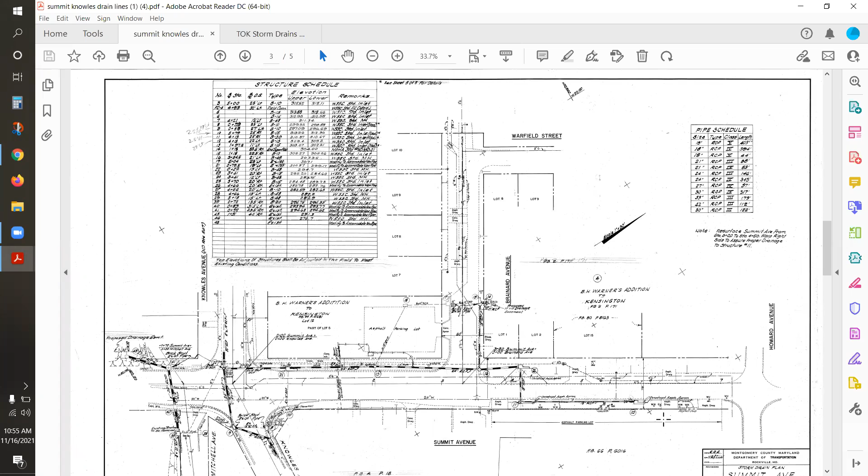So here's Knowles, that was further down from where I just spoke to. If you look further down here, you'll see that this is where Brainard is. So this is approximately where Red Ginger is, the Chinese restaurant. And, oops, sorry. And this is where Knowles Station was built.

So once again, these plans are at least from 1979. So that's what I'll give them the benefit from. So I'll just say at least 40 years old. And they were plans that were drawn up but never done. So it might give us a better idea of why we're flooding so much. So I'll start at the top.

So here's where Knowles Station is, right here. Over 40 years ago, they were planning on putting an 18-inch pipe running up. That was never put in. Kind of makes sense that if these plans were used as a baseline, that they thought that was here, because Knowles Station has water that runs all down the sidewalk and everything when it rains. So it's kind of really dangerous. So it'd be really nice if that 18-inch pipe was there.

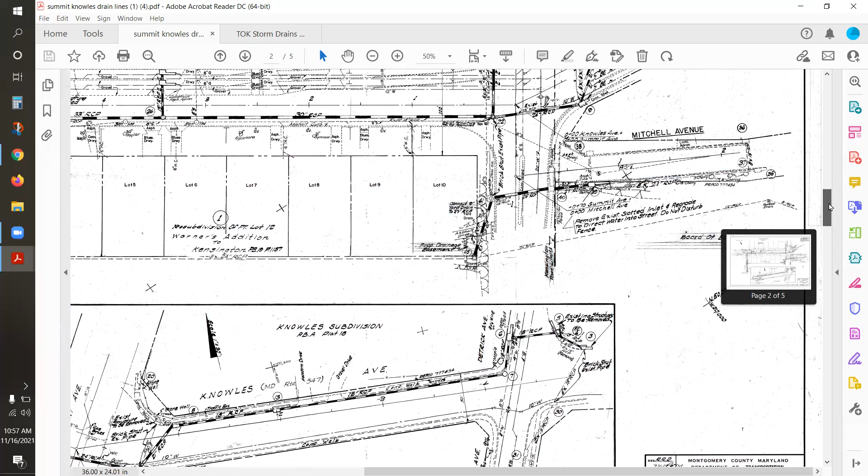Over here, this is Strosniders right about up here. And they were at one time going to block this 15-inch line that runs across, but it still exists. If you remember, the elder apartments tie into this line. And it keeps going down Detrick and then makes its way up Mitchell, or what is now called Kaiser, which is right here. So this section was never done. It'd be great if it was, because then we wouldn't have all those issues up there.

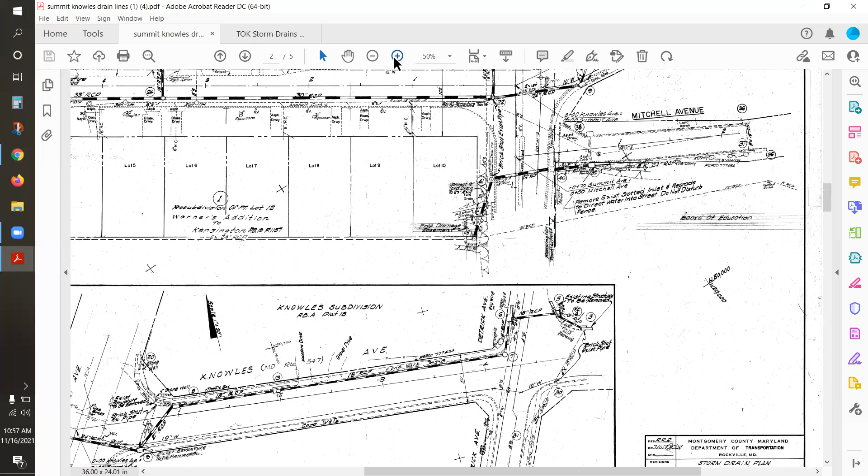It was going to cross over and become a 21-inch pipe. As it stands to date, we have a 15-inch pipe, and then running across, it's an 18-inch pipe. It's not a 24 as it says. So if you take a look at these plans yourself, you can see, and it's pretty accurate from everything I've looked into. Where it says EX, that's existing. So if you see EX 15-inch, that's existing 15-inch. It's still existing 40 years later now.

But that'll give you an idea as you run through these plans of what we have versus what was planned for back in the day. And you can see it says existing 18 RCP right here. It was going to be upsized to a 24, never was. And I'll roll back up to Summit.

Running across right here. So here's where the townhomes are being built. They had plans to upsize this pipe to a 24-inch RCP, and that's what it said for a long time in StormNet, but in reality, it's an 18, and that's consistent with the maps that Daniel and Matt sent out, that it's going to be upsized. At one time, this was going to be closed.

This right here is right here. So we had this drain inlet opened up about a year ago, a bit more. And so that's where we're talking about now. And there's a 27-inch line that runs here, 15-inch line that runs across, and then it downsizes. I'm going to call it downsizing, even if it's not the right terminology, to a 24. So we have a 27 and a 15 downsizing into a 24.

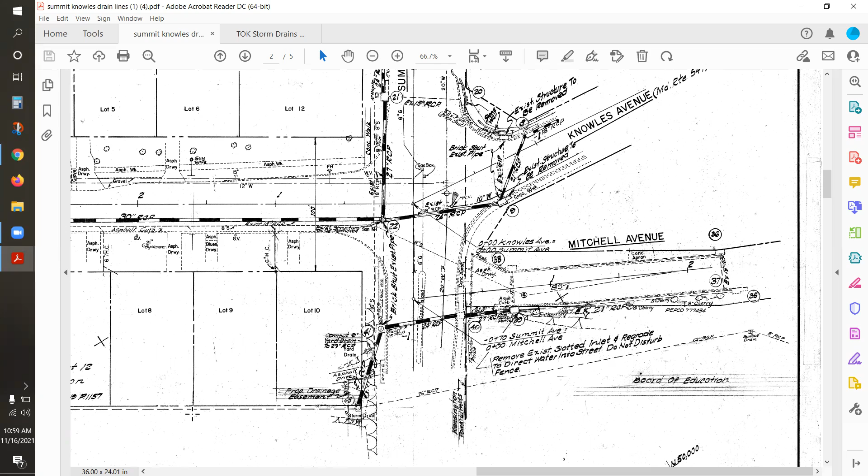Back in the day, it looks like they were going to upsize that to 24. We still have a 21 running across. They did not close this off. None of this was done. So we still have a 21 running across, a 24, and then a 27, and then steps down to a 24 with the addition of a 15. So that's a good reason why we have a river coming down. And let me see if I can find Brainard.

I apologize for the delay.

Okay, so here is Brainard. So right here is where Kaiser is. These plans from over 40 years ago had the addition of this line right here, this line right here, all of this to here. We do not have any of this. It'd be nice if it was. This is about where Red Ginger is. And instead, we have it crossing. You can see the existing.

This is actually not the correct size. They upsized this to roughly about a 24 by 24. There's some math involved there. So you got a 24 and a 24 running into a 15. So this is overflowing. But the maps in MCDOT, on the StormNet side, are much better than these, because they've done these within the last 40 years, but nothing else. So once again, 24-inch downsizing into a 15.

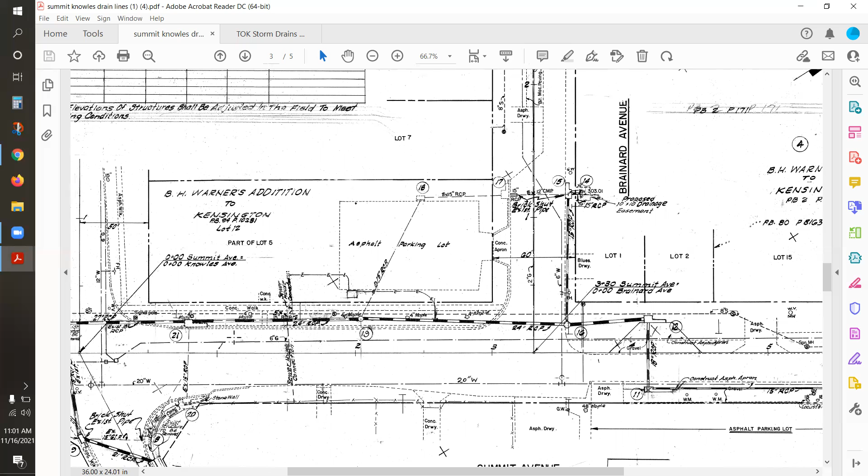This was going to be, it looks like, a 24-inch pipe back in the 70s, but it was never done. So once again, this whole section was never done. Instead, we've got a lot of water that pours down here and runs up Knowles. So this is Knowles and this is Summit, Kaiser, running towards my house. You can see it says existing 18-inch RCP. That is what we have. It was planned to be a 30-inch RCP, but that was never done.

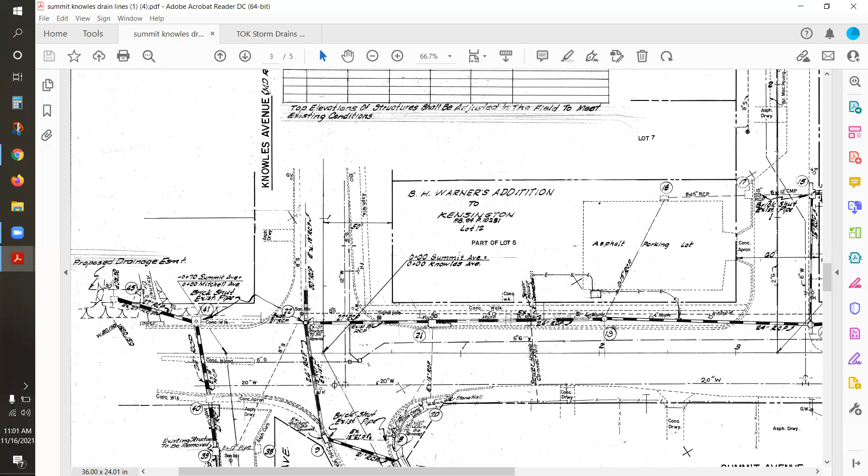So this is Knowles and Summit, to give you an idea of what that would look like back in the day. The 30-inch RCP that was going to be all the way up here is actually the pipe that runs down Warner. So all of the pipes that run this way, this way, this way, meet in my backyard, flow down a 33-inch into, I'm going to call it downsize, a 30-inch pipe, which is what they were planning on putting in just one line right here. And remember, all of this was going to be separate.

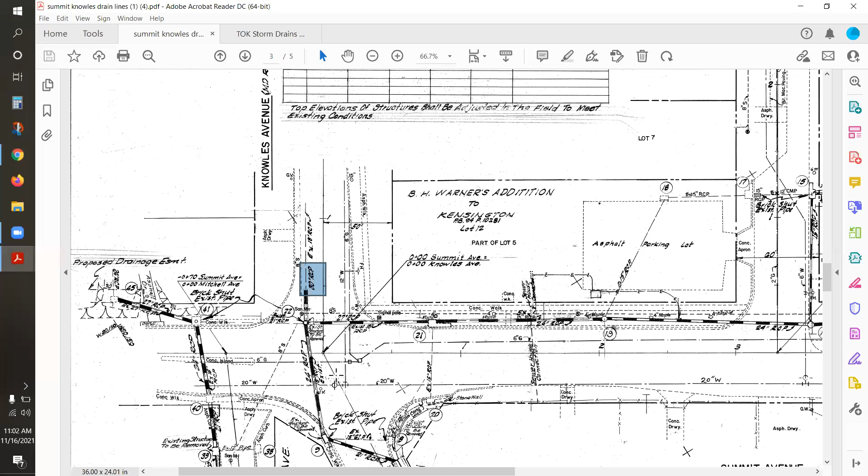So to me, that shows exactly how inadequate our system is. If they were going to build a pipe 45 years ago that was 30 inches just to take care of this whole area, instead we have it here taking care of this whole area. I don't know how they can say that our system isn't inadequate. But I'm going to keep on keeping on, and we'll run down Knowles. So here's Knowles.

So this is the 30-inch pipe, or what was going to be. Instead, we have an 18. And then it's going to upsize as it hits a 15-inch pipe that runs across the street. This doesn't exist. Be nice if it was, because then we wouldn't have all the cars coming through here splashing water on everybody on the sidewalk. This is where my house is.

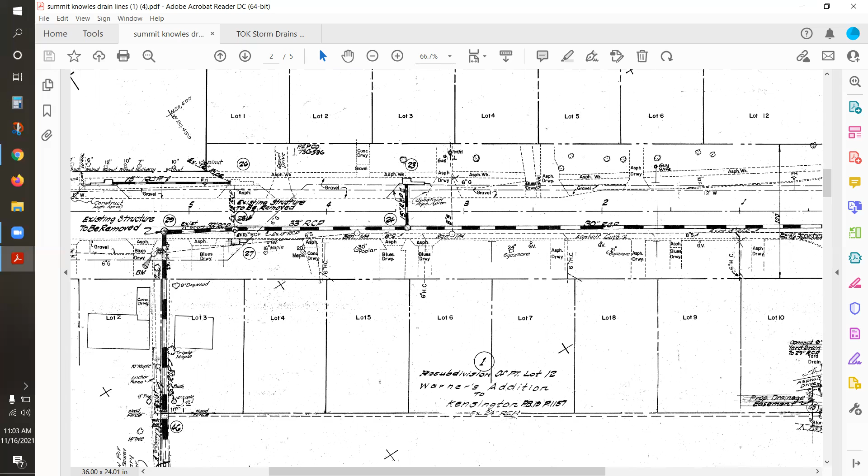Pay no attention to the trees. I really wish I had an apple tree. Evidently, 45 years ago, I did.

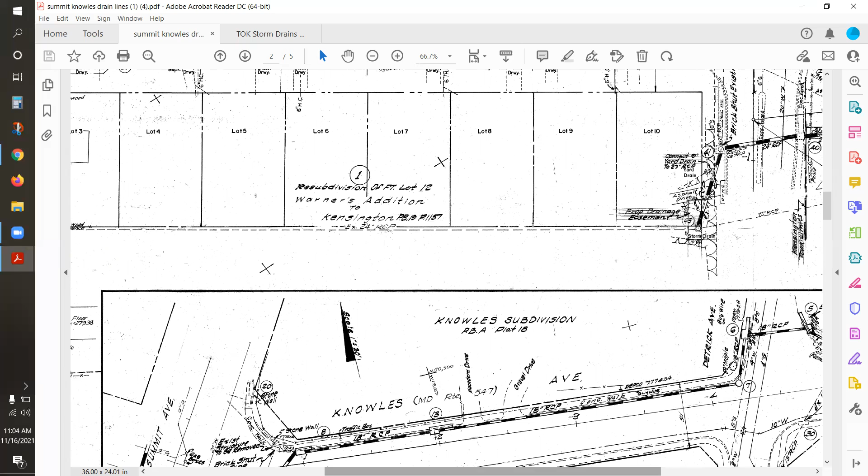This is going to be a 33. As it stands, we have a 21. This is a 24 right now, and it was going to be a 36, where it meets this 24-inch line. Now, keep in mind, this is where the 27, the 15, downsizes into a 24 and runs across into the drain column that overflows in my backyard. So right now we have a 24 going into a 33. 40 years ago, they were planning on making this 36.

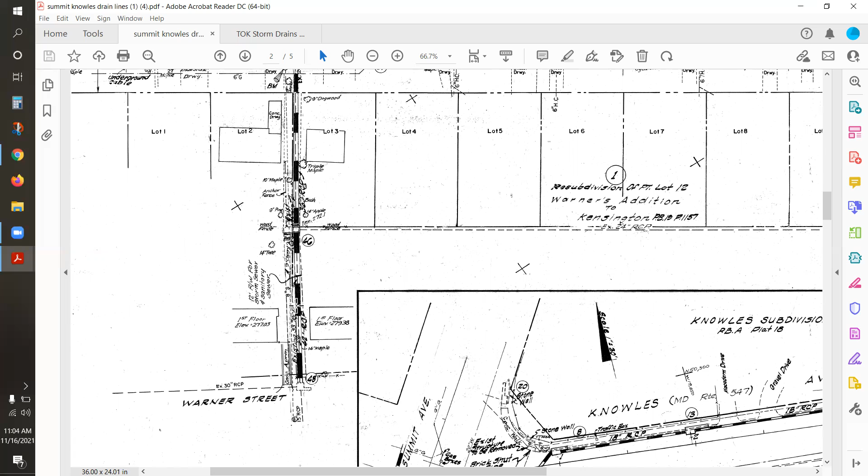I guess the 24 was going to stay in place going into a 42, and then adding a 15 and going down Warner. As it stands right now, we have a 30-inch pipe there. That's what I was speaking to before. So all of that water is running through a 30-inch pipe. I can only imagine what size that would be if we could find plans that were to be enacted back in the day. But it certainly would be more than 42. With the addition of the 15, it'd probably be a 46 or so. But to give you an idea, 40 years ago they were going to have that a 42-inch pipe.

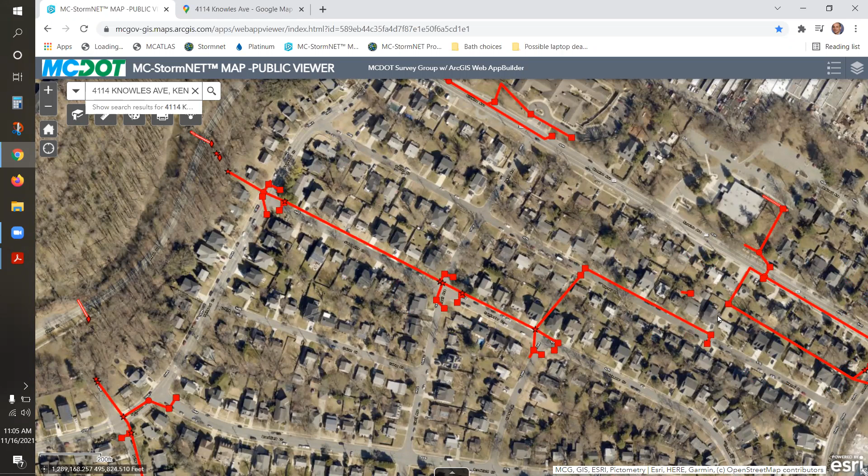A 42-inch pipe is what we have today at the very end. So this pipe all the way up here was supposed to be 42, and to this day we only have a 42 at the end. And keep in mind, that's with the addition of all this extra stormwater. So I imagine back in the day they were probably going to make this a 58 or a 56 or even a 60.

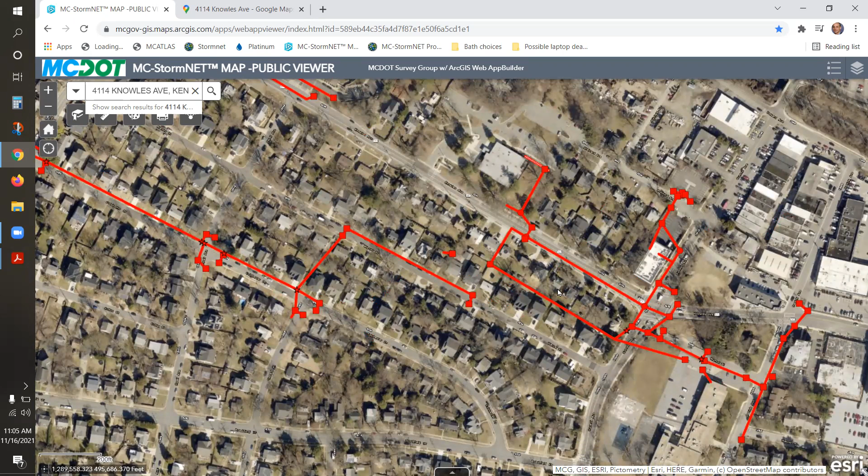But it makes sense with a lot of our flooding issues if what the builders and permitting are looking at is not the correct numbers, and they're not, because it's been such a challenge just to get the accurate numbers in the DOT or in the StormNet system. It's no fault of theirs. They rely on contractors, as you read, and they've got a whole county. We're just a little sliver.

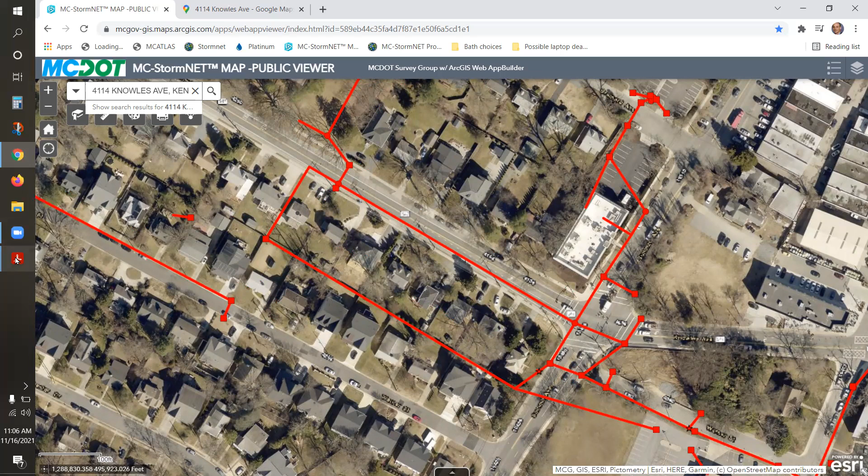But yeah, it gives a good idea. So I'll shoot these plans out with the email, and you guys can judge for yourself. Just keep in mind, where you see anything that looks like a candy cane, a lot of it's not built yet. And what is built, or what has something in place, is actually the existing number, because it was never upsized back in the 70s.